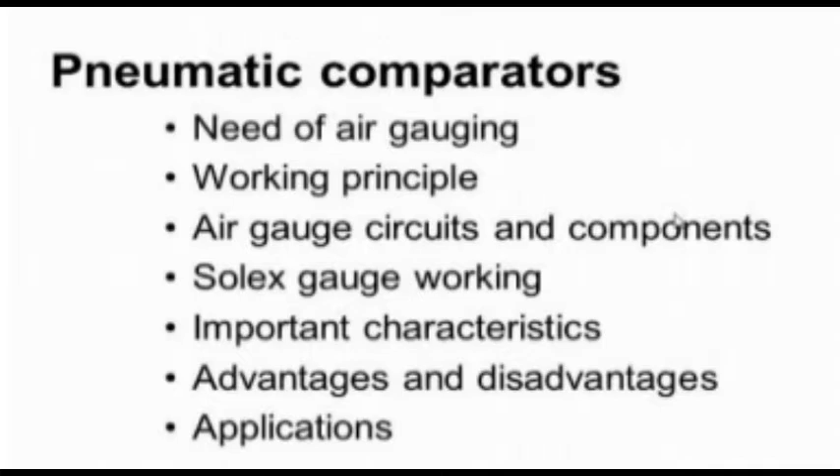Now let us study why there is a need for air gauging circuits or pneumatic comparators. Basically they are non-contact type of comparators. Because of this, they offer the advantages of improved workflow, increased productivity, and decreased downtime.

So they are ideal for measuring dimensions with tolerances smaller than 0.1 mm, and when gauging very tight tolerances, a resolution as small as 0.001 mm can be achieved.

Its non-contact characteristic makes air gauging particularly useful for checking very soft materials and highly polished surfaces, components with very thin walls, and other delicate materials.

In the case of delicate materials and workpieces with highly polished surfaces, if we use contact type comparators, then scratches may appear on the workpiece. So in such cases, non-contact type comparators are desired or selected. Pneumatic comparators offer that particular benefit of not making any such scratches on the workpiece surface, because it is a non-contact type of comparator.

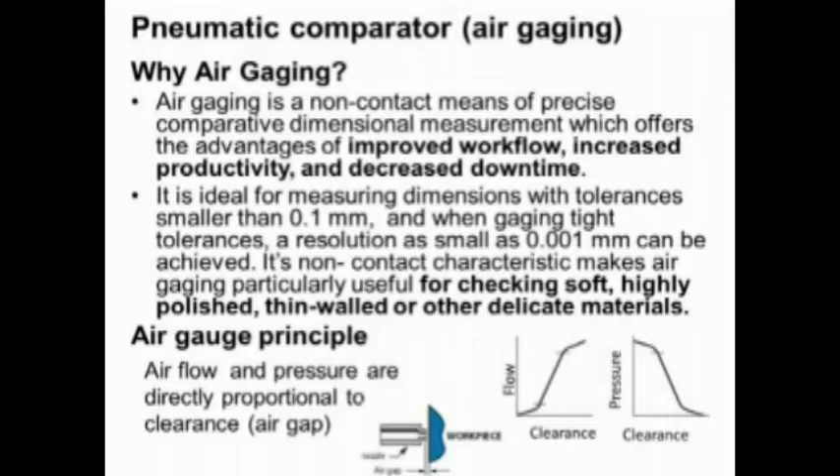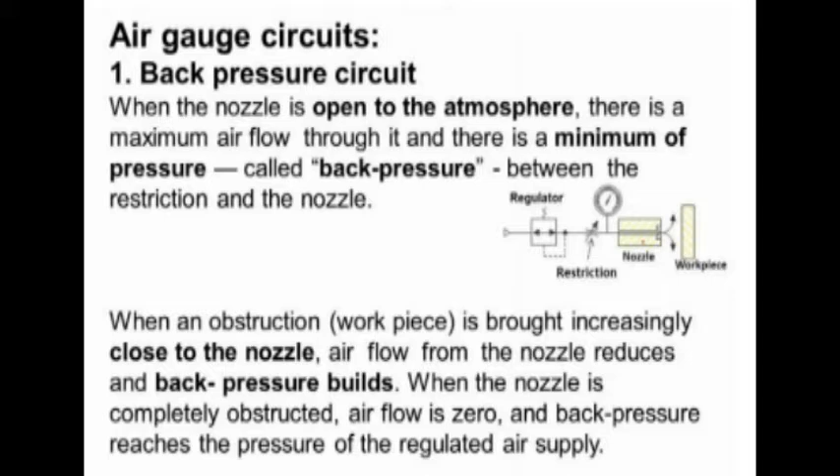Now when the gap between the nozzle and workpiece is high, the airflow is easy, the air escapes easily into the atmosphere, and little pressure is developed in the system. Now when the size of this particular feature increases, that means the air gap reduces, the escapement of air is restricted. So a back pressure is developed in the circuit, which is indicated. So the development of back pressure is used to indicate the dimensional feature in this particular circuit.

There is another circuit in which airflow is measured. Again we have the air plug gauge, wherein we have two jets. There is a workpiece, and this particular dimension, say capital D, is to be checked using the pneumatic comparator.

Now we have the pressure regulator, and then there is an airflow meter. For example, a rotameter can be used in such applications, rotameter we consider as an example. So in the airflow meter we have a float.

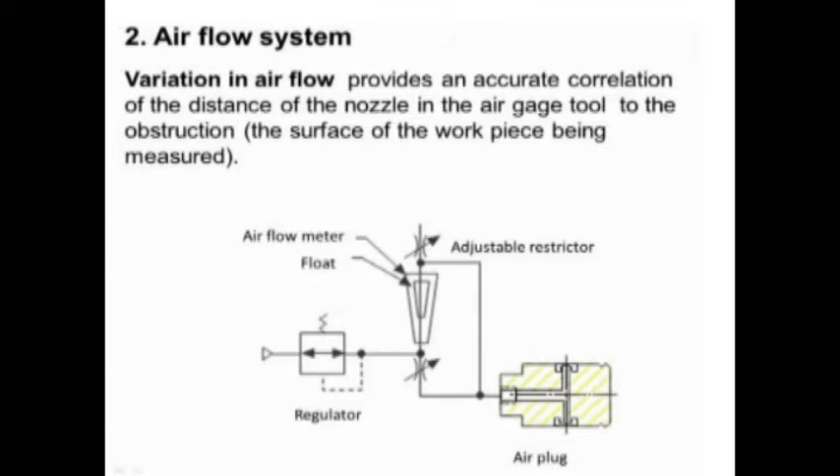Now when the gap between the plug and the workpiece reduces, the airflow is restricted, that means airflow reduces, so float level reduces. So when this gap increases, the airflow will increase, and air will escape freely. Hence airflow increases with the float level increase. There will be a scale fixed on the airflow meter. So by knowing the position of the float with respect to the scale, we will come to know about the size of the workpiece. Now let us study what are the various components used in the pneumatic comparators.

Essentially, the comparator requires a precision air regulator to provide a constant pressure air supply to the system, and then different kinds of tooling are needed, like plugs, rings, and other shapes depending on the work to be inspected. These tooling deliver a specific airflow or pressure to the surfaces being checked.

An amplifier is another essential component used in the pneumatic comparator, and this amplifier can be an air electronic column, a dial type meter, or a flow meter. The amplifier provides a visual representation of the size being measured, permitting the user to take readings quickly and accurately.

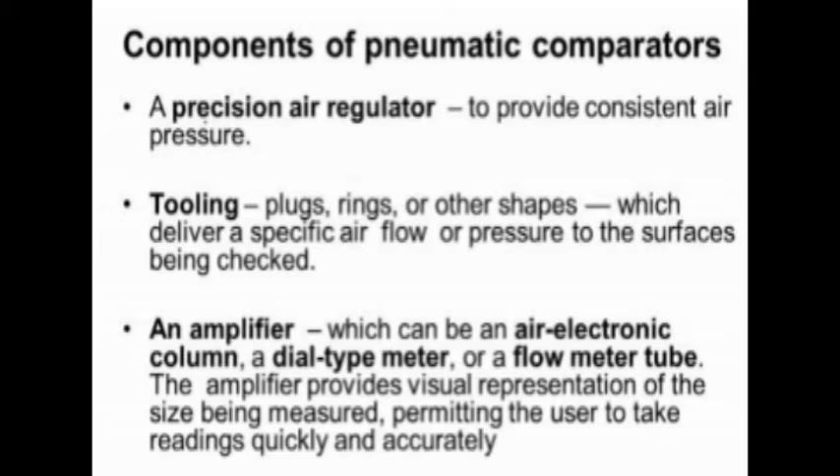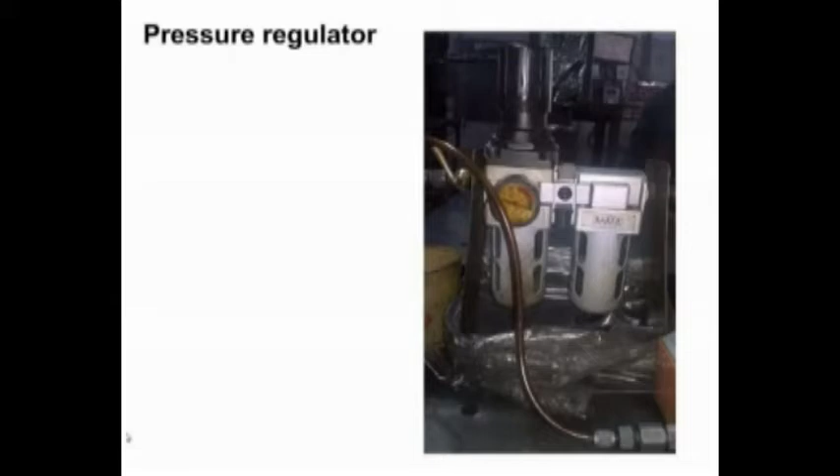Now in this figure you can see a pressure regulator, with a filter to clean the air supplied. There is a knob to adjust the air pressure, and the level of pressure available in the system can be noted down using this pressure indicator.

There are setting masters, which are used to calibrate the comparator depending upon the system. One or two masters, usually in the form of discs or rings, are used. Masters are typically made from alloy steel or tungsten carbide.

One set of setting masters is used to calibrate the system, one set for setting the upper limit of the workpiece, and another set for the lower limit of the workpiece. This is a close view of a setting master.

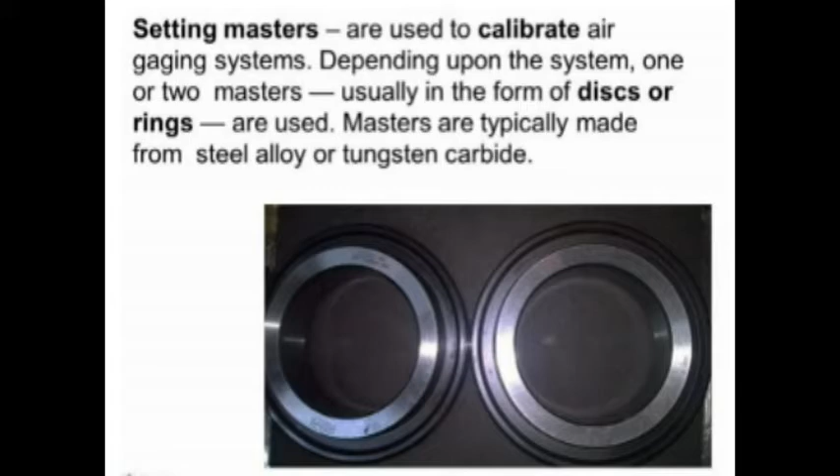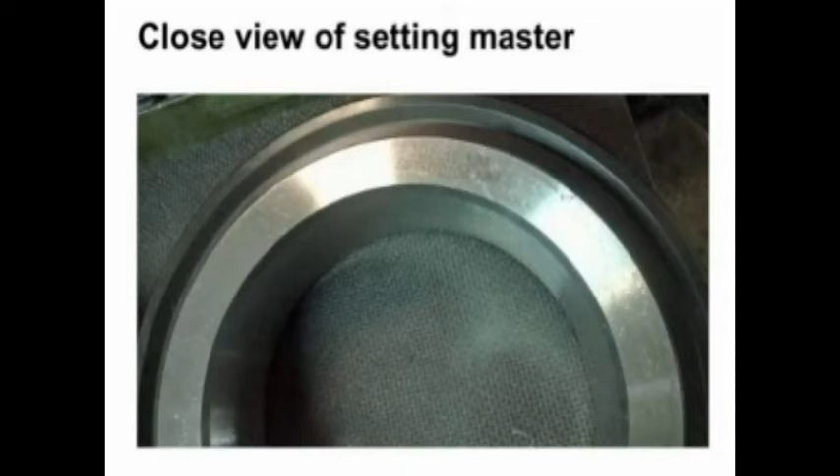Then we see another setting master, used for the lower limit of the workpiece. Suppose the upper limit is 102.01 plus 0.0104, and the lower limit is 102.01 minus 0.0094 mm. So you have clearly observed this.

When the gap between the work surface and the gauge reduces, the airflow reduces and the float level comes down, indicating that the dimension being checked is very small. When the gap increases, the airflow is more, so the float level increases, indicating that the dimension of this feature is more.

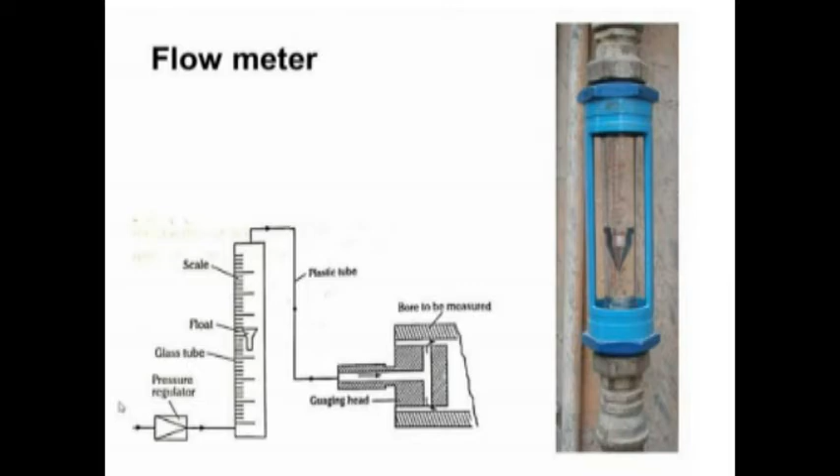We can always set two limits, upper and lower, using the setting masters. When the float crosses the upper limit or lower limit, the workpiece is rejected. Now let us see the working of an air gauge apparatus.

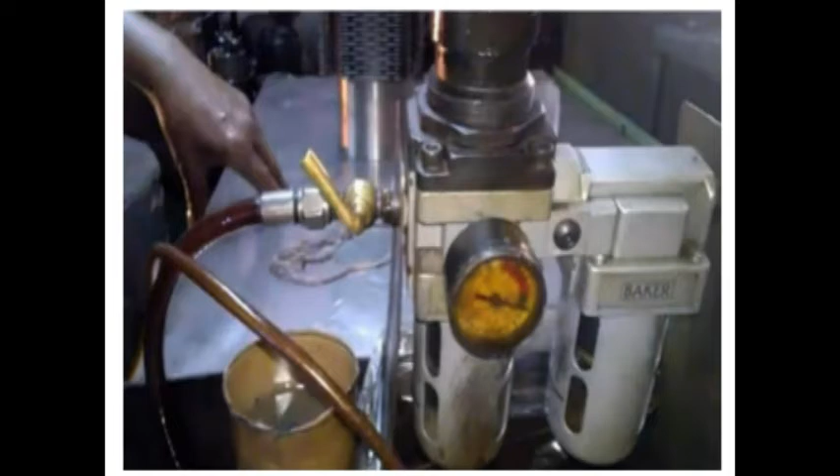Now the operator is removing the workpiece. We can see the coolant flow and the lubricant flow. Now the honed surface is visually inspected for surface finish.

Now we are observing the pressure regulator and filter, and we can see the pressure indicator. By using this, we can set the working pressure to the required level, like 3 bar, 4 bar or 5 bar. This area indicates the pressure range in which the air gauge can be used.

Now we are observing an indicator which shows the size variation in terms of microns, where one small division is 1 micron. When we insert the plug gauge into the bore of the workpiece, depending upon the clearance between the workpiece surface and plug gauge, the pointer will move and we can note down the reading.

Now we can observe the operator inserting the plug gauge into the bore, rotating the workpiece or gauge to check for roundness, and moving it vertically to check the cylindricity of the bore.

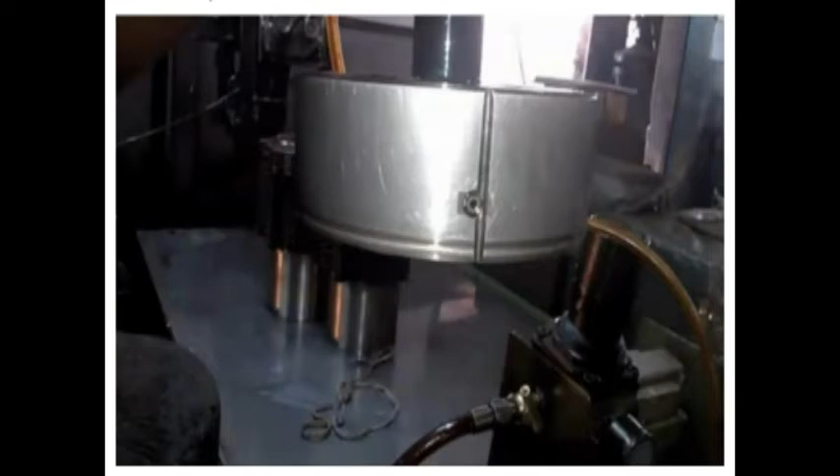Now we can observe the air plug gauge, or air jets, through which air escapes. In the opposite direction we have air jets. Now we can see the air connection via the air gauge. The air will flow and enter into the air plug gauge.

We can set the air gauge. For initial calibration, we use the masters. We can set the limiters. We can observe two limiters are there, which we set to indicate the upper limit and lower limit of the bore size.

Now the plug gauge is being inserted into the workpiece. The operator rotates the workpiece and removes the plug gauge. Now we can observe the two masters for initial calibration of the air gauge, which represent a desired size and a lower size. Now we are observing the indicator removed from the air gauge setup.

So we can see the plunger. When the plunger is moved, the pointer rotates. We can see the range 0 to 50 microns on both sides, clockwise as well as anti-clockwise. Now there is a place where the indicator should be inserted, and the operator is inserting the indicator, then using masters we can set the indicator.

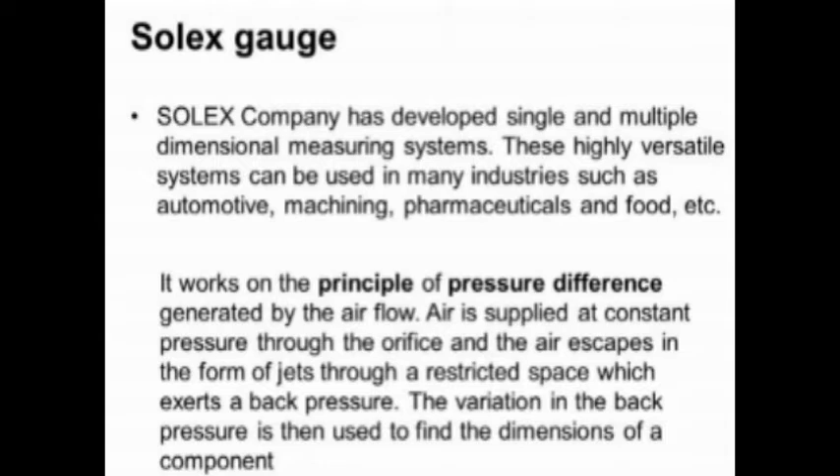Now let us study how the Solex gauge works. Compressed air is supplied to the system. The pressure of the air will be equal to water head H. We have a tank filled with water to a certain level, and H indicates the air pressure. This value of pressure can be varied by adjusting the depth of the dip tube in the water tank, so we can adjust the depth and thereby adjust the pressure in the system.

Then excess air escapes in the form of bubbles, which we can observe here. The controlled amount of air is passed through the orifice. We have an orifice here, connected to the gauging head. The controlled air is connected to the gauging head via the flexible tube.

Due to the restricted area between the gauging head and the workpiece, say for example at position 1, A1, the back pressure H is developed because of this restriction, which indicates the size of the dimension feature, for example the hole diameter in this case.

You can also determine the roundness and cylindricity of the job using this system. To determine roundness, the workpiece is rotated along the jet axis. If there is no variation in the pressure reading H when the job is rotated, it indicates that the workpiece is perfectly round at that particular position.

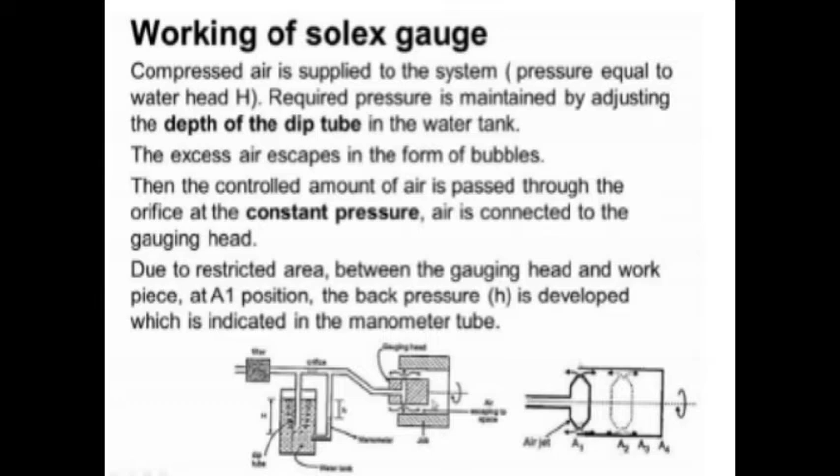And now let us study what are the important advantages of pneumatic comparators.

The gauging member does not come in contact with the part to be measured, and hence there is no wear of the gauging member, and also no chances of scratches on the surface of the workpiece. It has usually a very small number of moving parts, thus accuracy is improved due to less friction and less inertia, and the measuring pressure is very small, as low as 3 to 4 bar, and the jet of air helps for cleaning off work surfaces.

We can also have a very high magnification, as high as 10,000 times. The indicating instrument can be remote from the measuring unit.

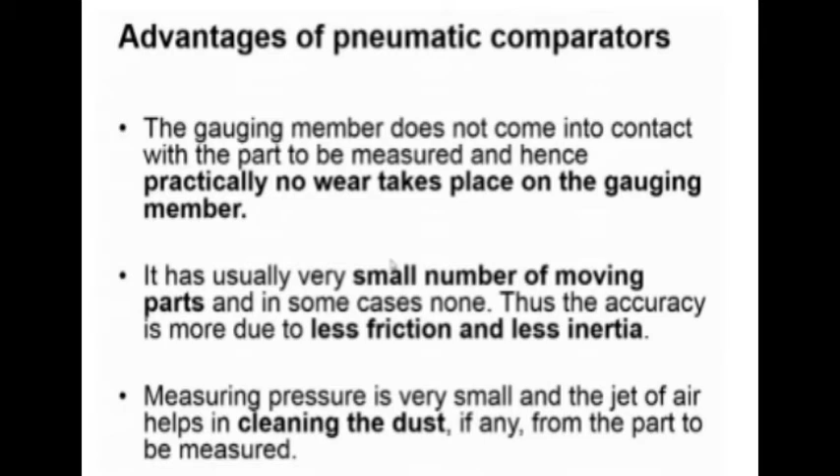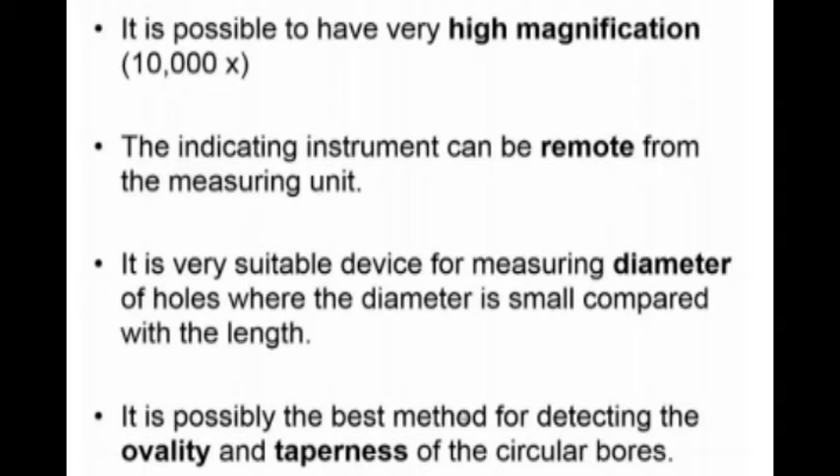These air gauges are very much suitable for measuring the diameter of holes, where the diameter is very small compared with the length. For example, deep holes like gun barrels can be easily checked with these gauges. It is possibly the best method for detecting the ovality and the taperness of circular bores, so we can check whether there is any taperness, bell mouth shape, or barrel shape in the hole.

These amplifiers provide a visual representation of checked features, so it permits the operator to take readings quickly and accurately.

Either a back pressure system can be used, or flow systems with flow meter tubes can be used for visual representation, and parallel stacking of columns or flow meter tubes puts all the readouts into the same vertical relationship, making comparison much simpler. So multiple dimensions can be checked using multiple gauging operators, and their relationship can be easily understood by using the multiple amplifiers.

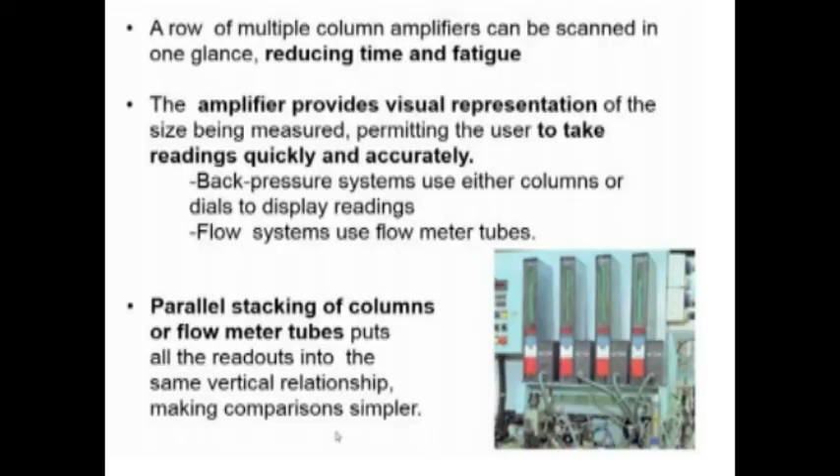Relationships, for example squareness, can be easily checked by using air gauges. For example, we have a bore, and we can check whether this bore is perpendicular to the face. Such features can be easily checked.

Air gauging is very much economical. Once the basic system is purchased, relatively inexpensive additional tooling such as gauging heads can be purchased and used for a wide variety of applications. Since air gauge tooling has fewer moving parts, and in most cases no moving parts, it is virtually immune to trapping, meaning the gauge will not get trapped into the workpiece.

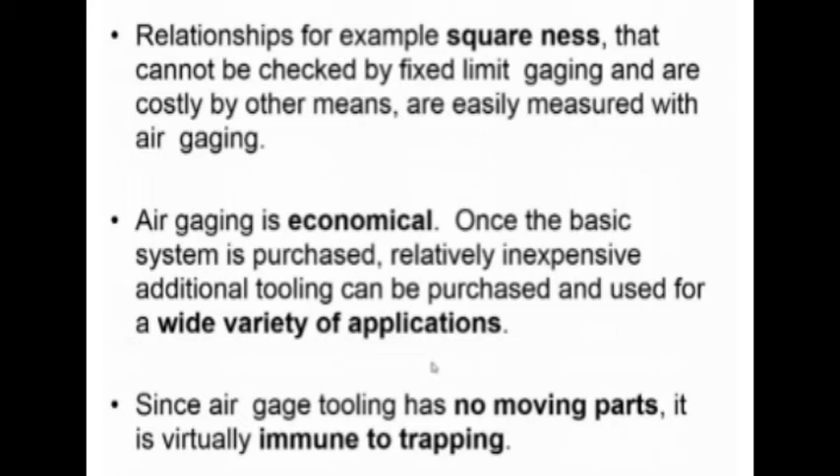Now let us study the various disadvantages of air gauging systems. It requires very elaborate auxiliary equipment, such as pressure gauges or pressure regulators. Air filters are needed for filtering the dust particles. So, like this, it requires elaborate auxiliary equipment.

The scale is generally not uniform when the indicating device is a glass tube, for example a manometer, so very high magnification is necessary in order to avoid meniscus errors. The apparatus is not easily portable since it is bulky, so it should be placed in one place and is rather elaborate for many industrial applications.

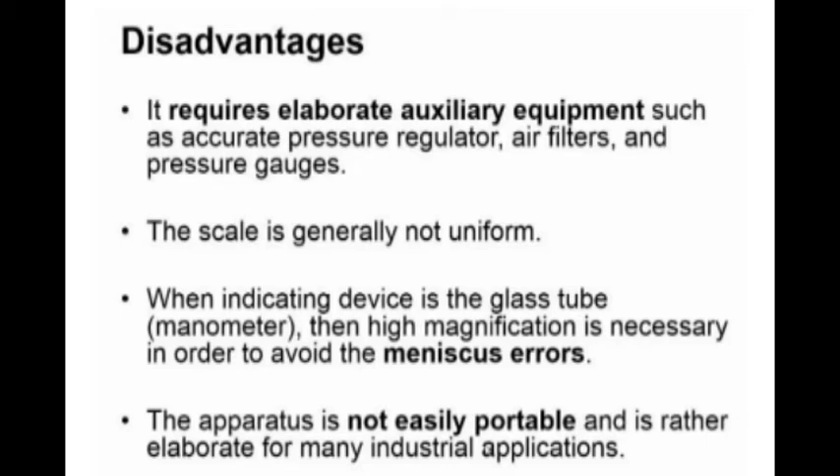Different gauging heads are required for different dimensions. For example, when the bore size changes, we have to use a different set of gauging heads. For a 10 bore size, we need one gauging head, and for a 12 bore size, we need another gauging head. So, as the dimension changes, we need to purchase the necessary gauging heads.

The accuracy may be influenced by the surface roughness of the component being checked, meaning the surface roughness will also affect the reading.

Air gauges are very sensitive to temperature and humidity changes, so sometimes it becomes necessary to control the working environment where the air gauges are used. Now let us study the various applications of air gauging.

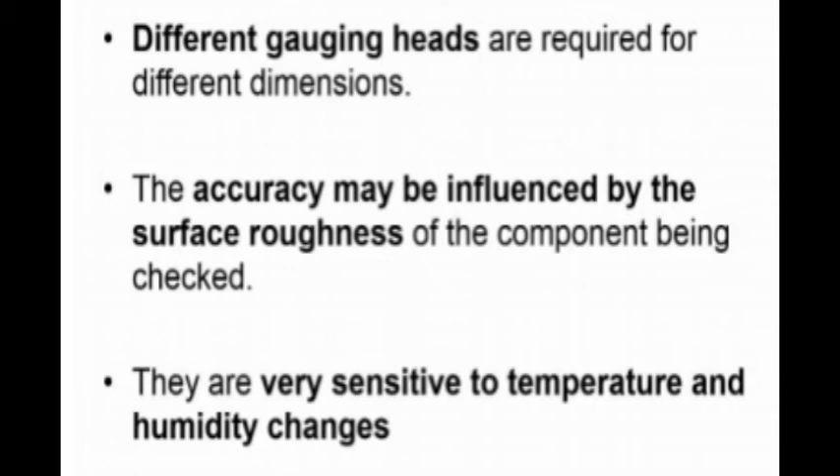Air gauges are used for dimensional control of aerosol spray nozzles, and they are used to control gun barrels. They are also used to control the dimensions of knee prostheses.

They are very much used for dimensional control of mechanical parts such as bore size, and bore shape faults can be detected. That means straightness of tubes for hydraulic cylinders.

For example, we have a hydraulic cylinder with a bore. Whether the bore is straight or whether the bore is perpendicular with respect to the face or not, such things can be checked. They are used to check car shock absorbers and perpendicularity of bore to face. Such features can be easily checked by using air gauges.

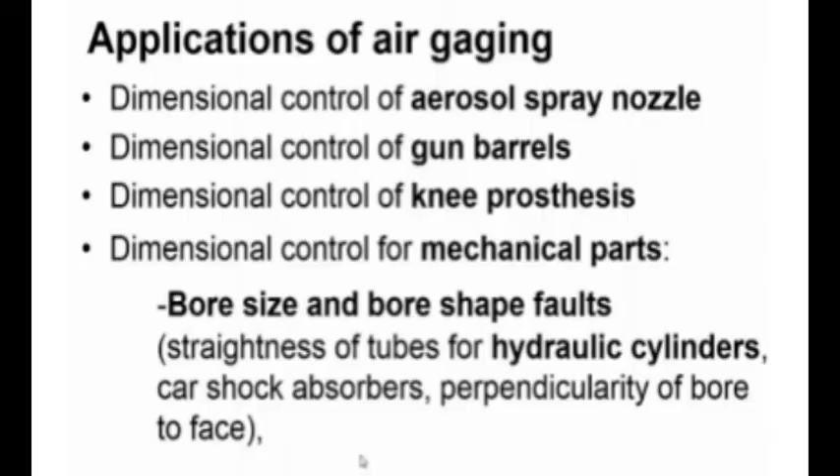Dimensional control of mechanical parts such as engine cylinder linings can also be checked. These engine cylinder internal surfaces require very good and fine surface finish, with no scratches appearing on the internal surface of the liners. Since the air gauge is a non-contact type, they are very much used to inspect the lining and cylinder lining internal surfaces.

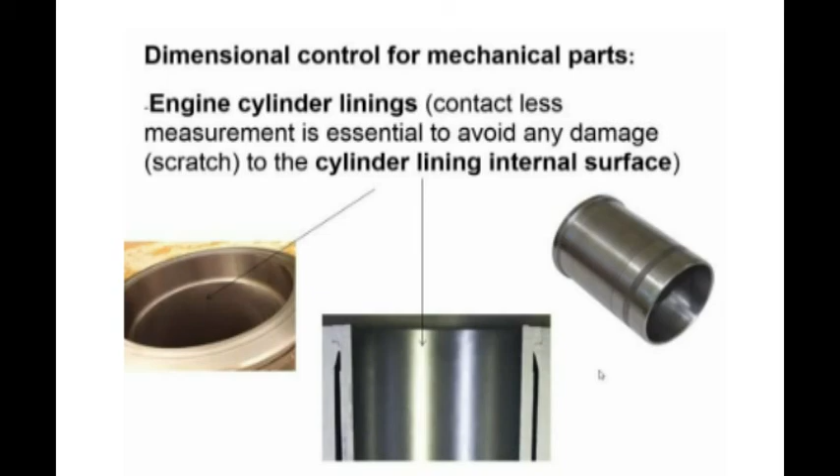It is now possible to measure multiple bores at a time, and the distance of the bore from a face. For example, we have a bore and then a surface here—the distance between the bore and its face can be checked. It is also possible to measure the average diameter by having multiple jets, giving the average size of the bore using these air gauges.

They are used for inspecting castings, injection molded or welded parts, tanks, piping, and hydraulic nozzles, and braking system components are checked by using the air gauges.

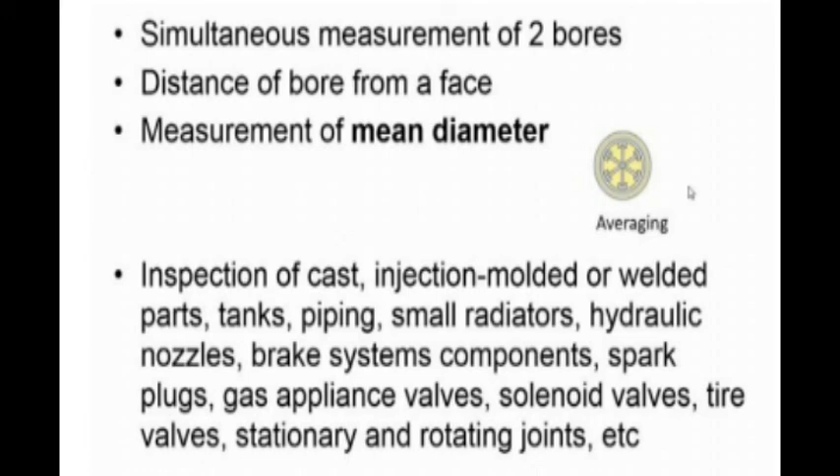They are also used to check spark plugs, gas appliance valves, solenoid valves, tire valves, stationary and rotating joints, etc. The testing of carburetor and gas appliance jets, injectors, and injection molding nozzles are checked using air gauges. So burners and nozzles are checked.

Shock absorber nozzles are checked by using air gauges. Cast iron and injection molded transfer canals and outlets of complex bores are easily checked by air gauging systems, and mean diameters of extruded tubes, cigarettes, etc. are inspected using air gauges.

The adjustment of pneumatic and hydraulic apparatus, and needle regulating flaps and piston cylinder play, such things are checked by using air gauges.

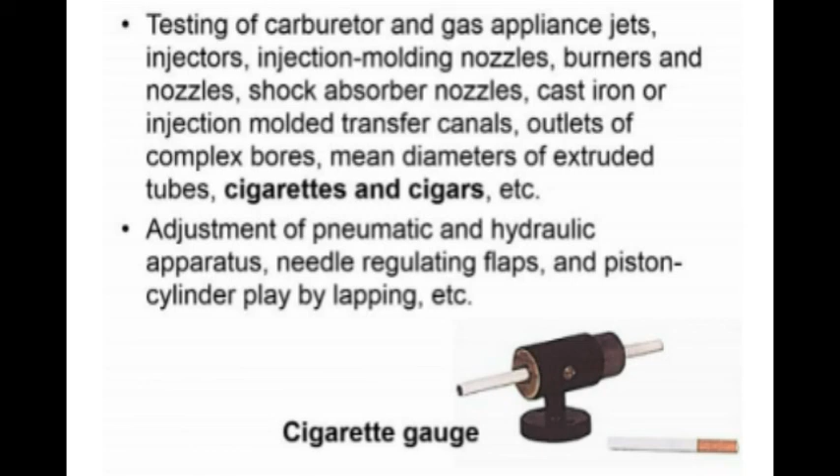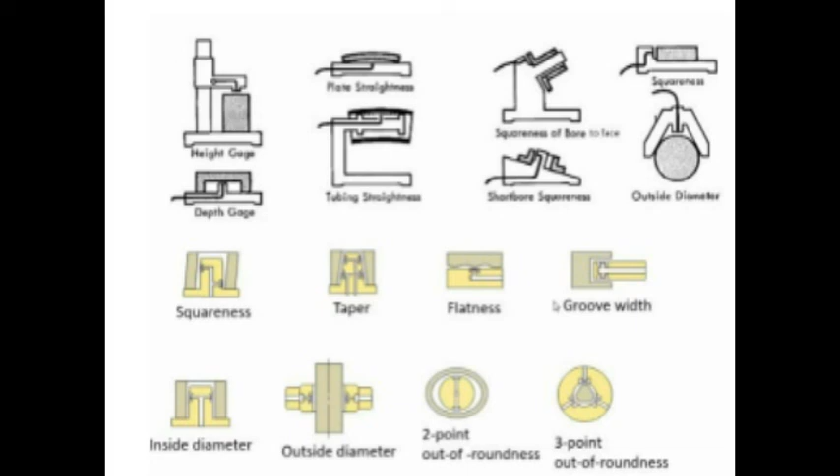The squareness of the bore with the face can be checked, and the taper in the component can be checked, along with flatness, groove width, inside diameter, and outside diameter—such things can be easily checked using air gauges. This shows a system wherein two-point out-of-roundness can be checked, and here three-point out-of-roundness can be checked.

So these are the various different applications of pneumatic comparators.